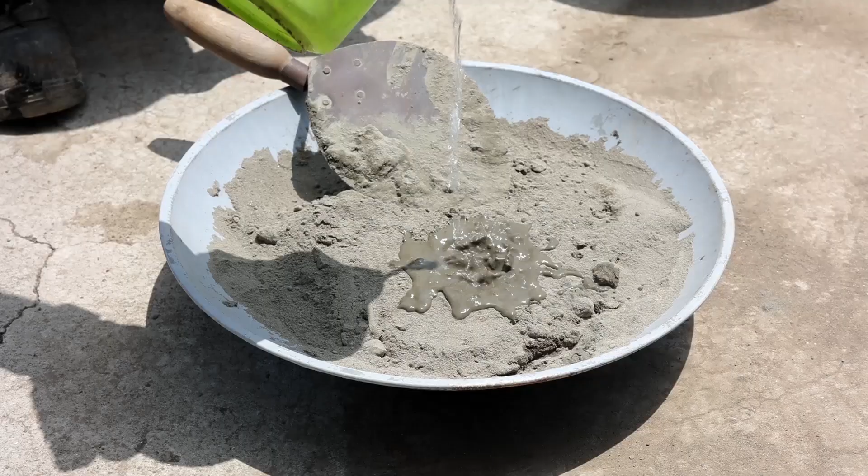You are mixing this wrongly. If you mix it with a trowel, it will not mix properly and will not be usable. Now we have got a new mixer machine for mixing mortar.

You leave it, let me tell you how to use that machine. Come with me.

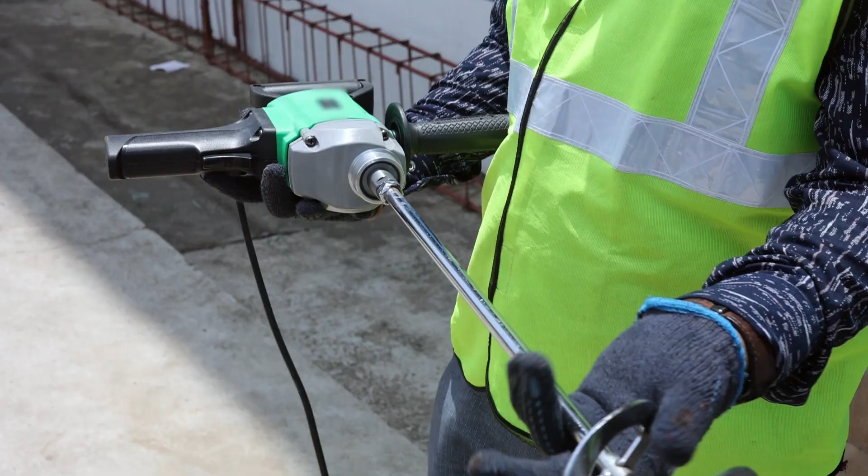This is the mortar mixing machine. These are the mixing paddles. It has two handles and this is its switch.

Whenever you have to work with this machine, hold the handle from both sides and rotate it around while pressing the start button. This will mix your mortar properly.

Let me show you how to use it once. Press while holding the handle like this.

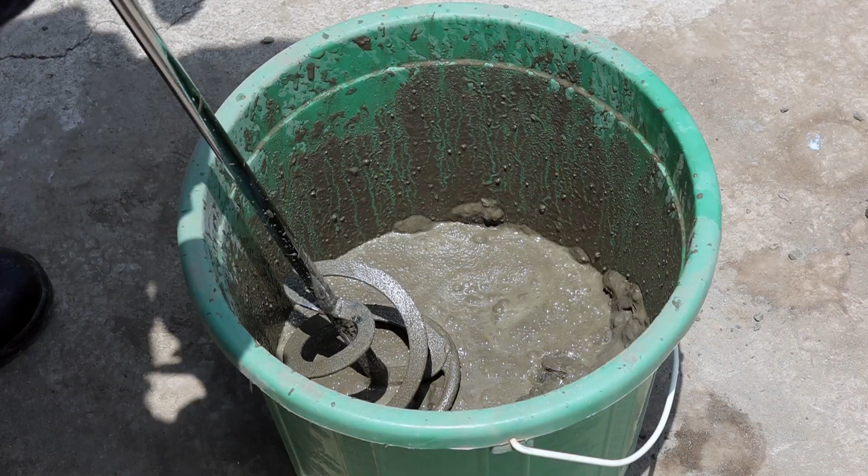After using it, you have to clean its paddle properly like this. This will clean its blade.

Just like I have mixed the mortar, you also have to mix it and show it. Grab it, press the button, then spin it around.

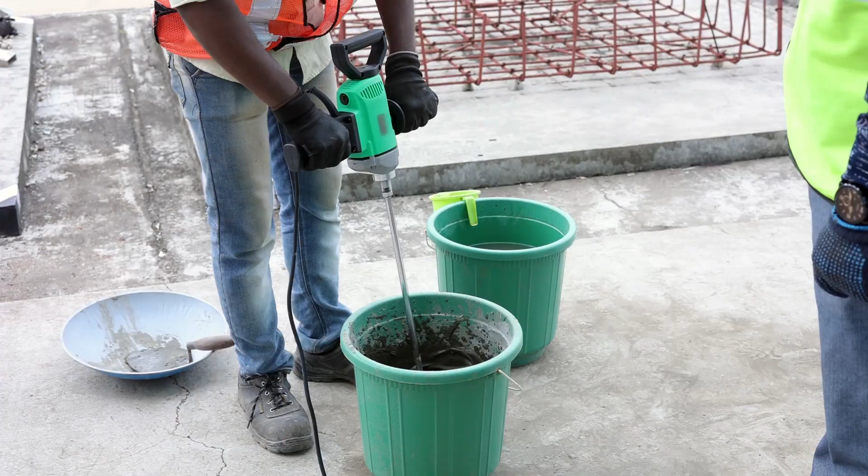Then to clean it, it has to be swirled in clean water.

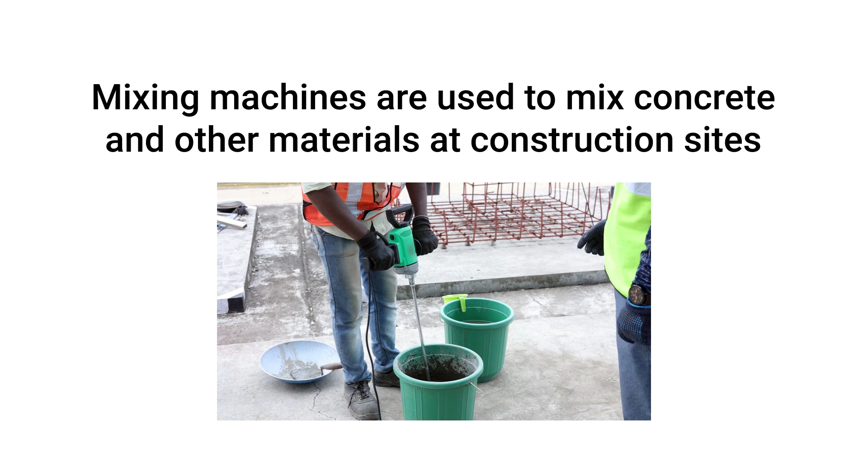Mixing machines are used to mix concrete and other materials at construction sites. It is used to prepare a strong and uniform mixture.

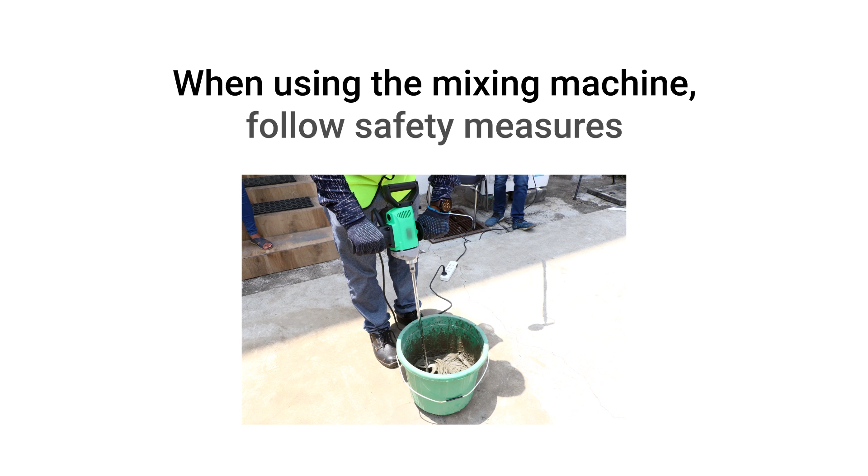When using the mixing machine, follow safety measures. You can also wear a dust mask and noise-reducing ear muffs.

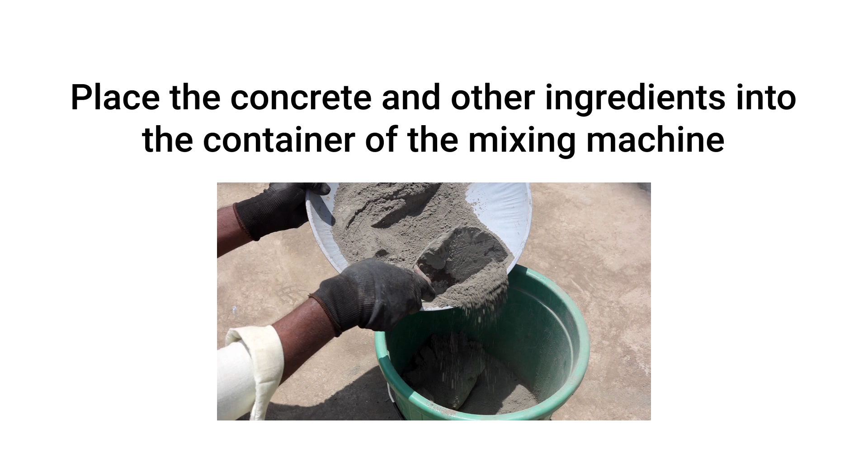Place the concrete and other ingredients into the container of the mixing machine. See carefully that the ingredients are added in equal quantity.

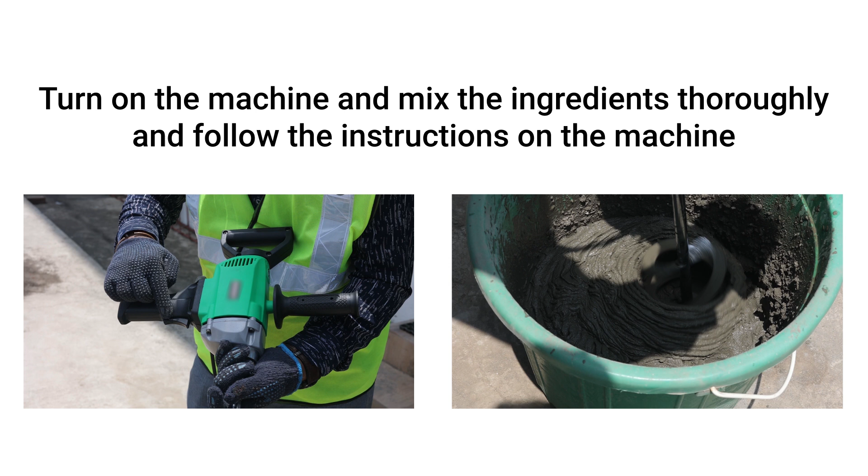Turn on the machine and mix the ingredients thoroughly, following the instructions on the machine. After finishing the work, shut off the machine in time and keep it in a safe place.

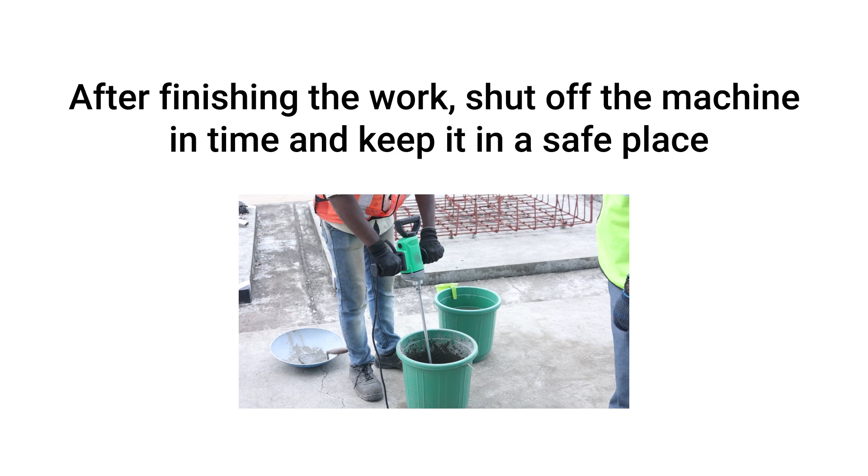Now let us understand the correct way to use our mixing machine. Follow safety measures. Put cement and other materials into the mixing machine.

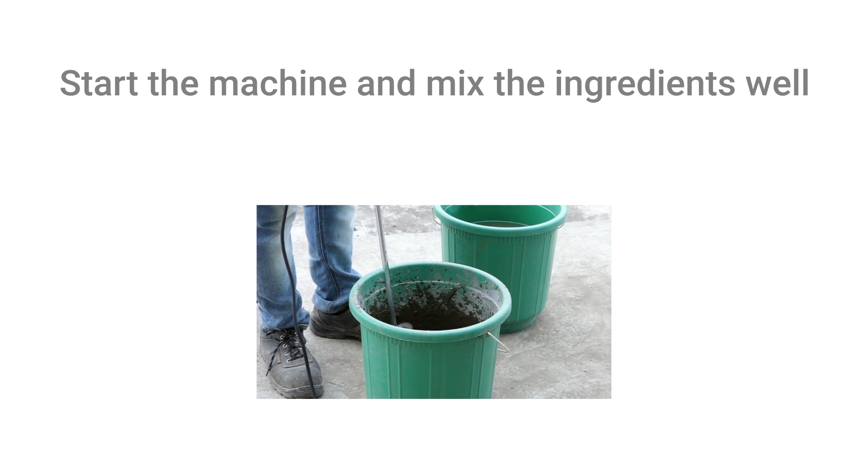Start the machine and mix the ingredients well. Keep the machine in a safe place after the work is finished.

Use of notched trowel. Let us know how to use notched trowel properly.

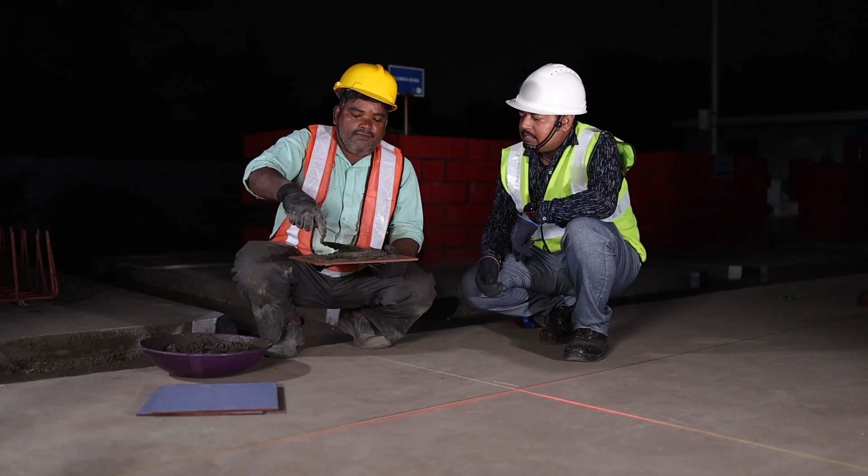To lay tiles, do you apply mortar with a trowel? Yes, sir. Due to this, the layer of mortar will be more or less - sometimes less, sometimes more, it will not be equal.

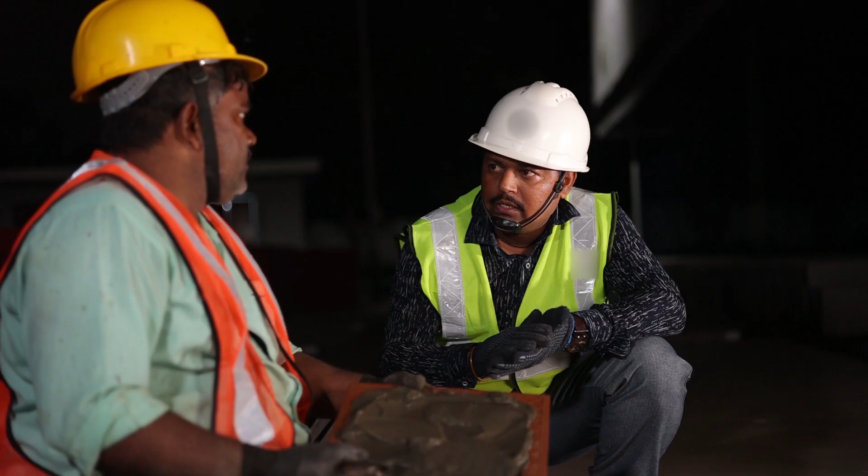Yes, sir. For this you should use a notched trowel. These are its notches. If you apply mortar on the tile with this, then its surface will be uniform. Yes, sir. Let me tell you how to use it.

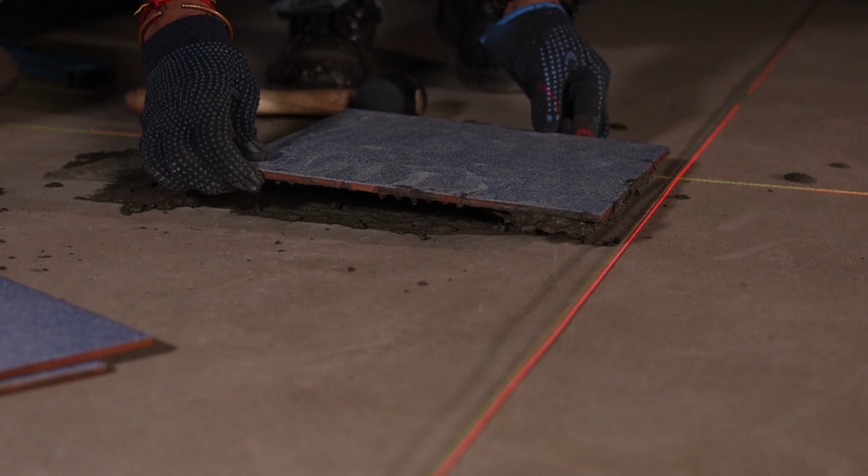Applying a uniform mortar will ensure that your tile is set properly and will never break when you fix it with a rubber hammer.

Then check it once with a leveler. If it is in the center, then it is fine. If not, then correct it with a rubber hammer and then check with a leveler.

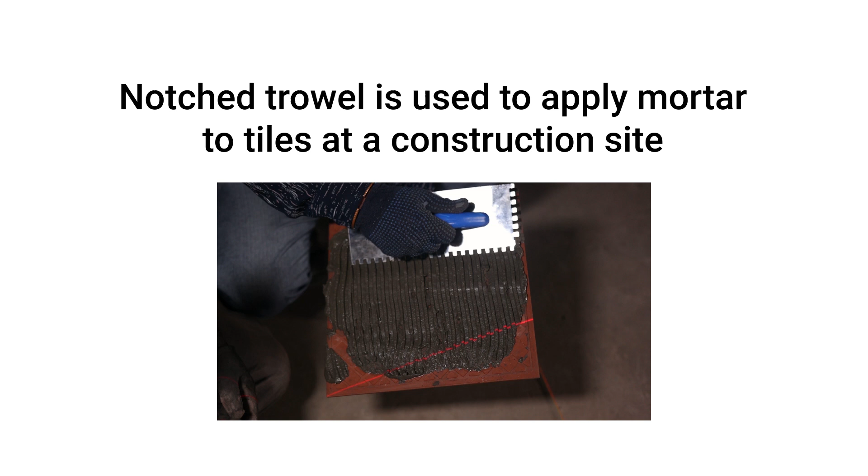Notched trowel is used to apply mortar to tiles at a construction site. It has a zigzag-shaped blade which helps in applying the mortar to the tiles.

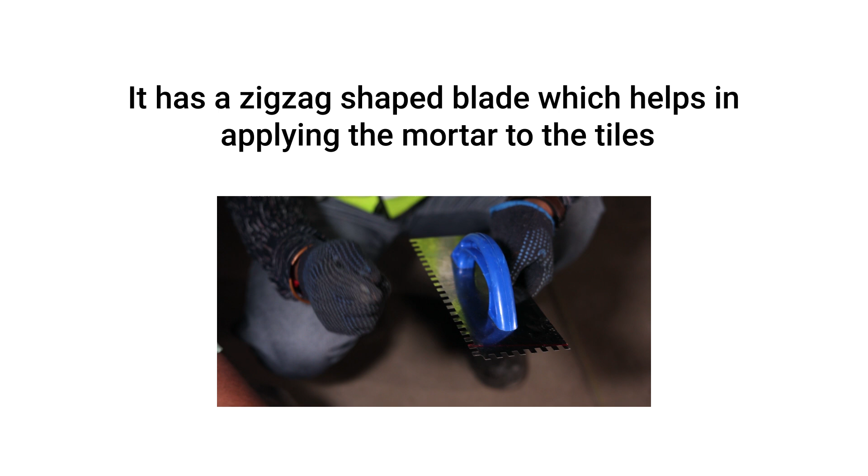When using a notched trowel, follow safety precautions. Use safety glasses, helmet, and gloves. Also use a dust mask to avoid dust and adhesives.

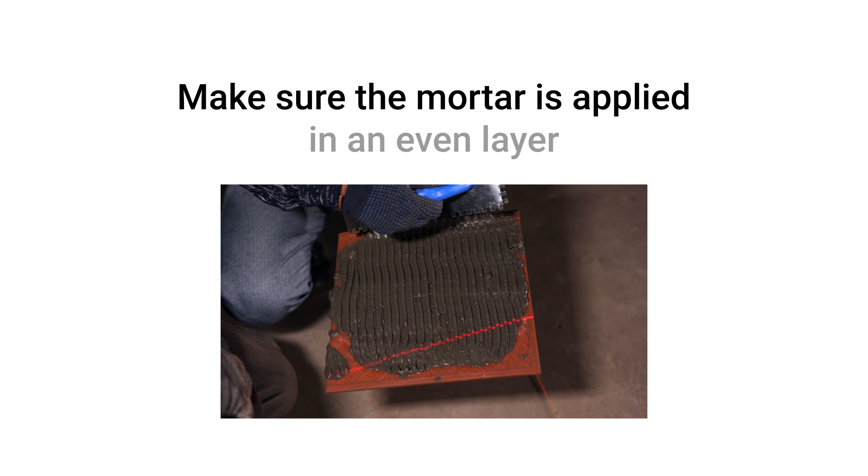Use a notched trowel to apply the mortar to the tiles. Make sure the mortar is applied in an even layer.

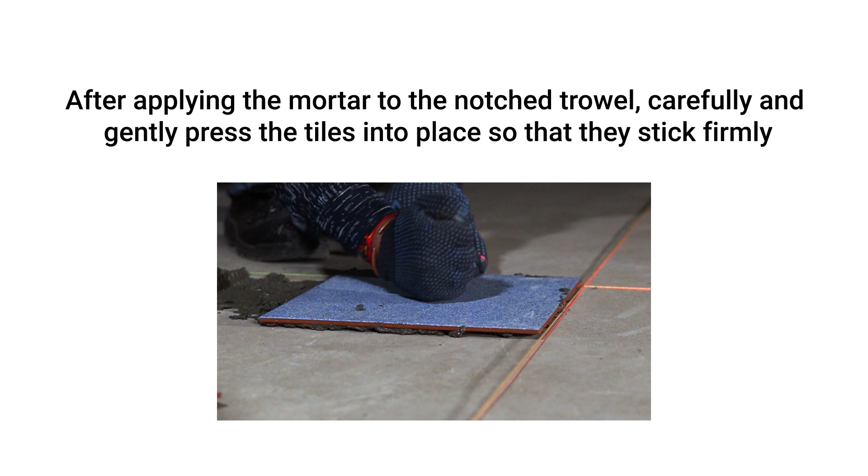After applying the mortar to the notched trowel, carefully and gently press the tiles into place so that they stick firmly. Clean the notched trowel after the job is finished.

Now let us understand the correct way to use a notched trowel. Follow safety measures. Place the mortar on the notched trowel.

Carefully and gently press the tiles into place so they stick firmly. Clean the notched trowel after you are finished.

Use of mortar mixing tray. Let us know how to use the mortar mixing tray correctly.

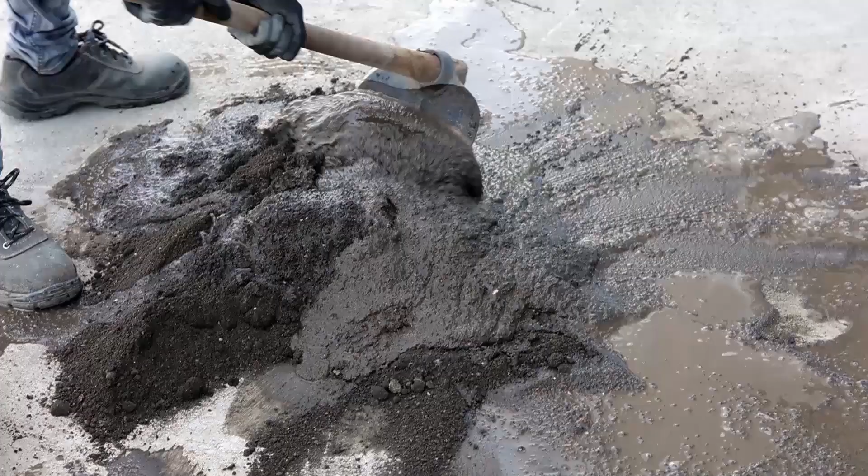Wait, this isn't how mortar is prepared on the ground. Too much water has been added and cement is also flowing.

We have a mixing tray for this, we will use that. This will make the mortar well and there will be no loss of material. This is a mixing tray, prepare the mortar in it.

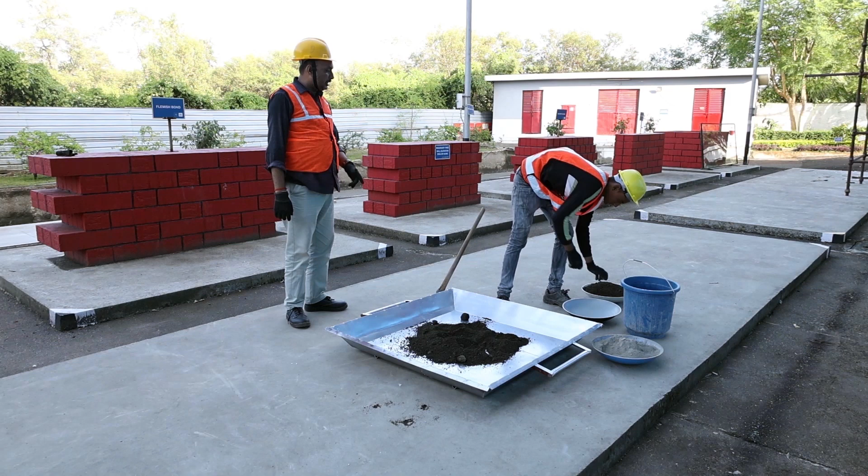Pour as much cement as you need. Very good.

You can see that the mortar is being prepared very well. It is mixed properly. Now add water to it.

You understood how to prepare mortar in a mixing tray. Due to this, neither the ground got dirty, nor the water and cement got spoiled. The mortar was also prepared properly.

The strength of the mortar prepared in this way is more than that made on the ground. That is why mortar should always be prepared in a mixing tray.

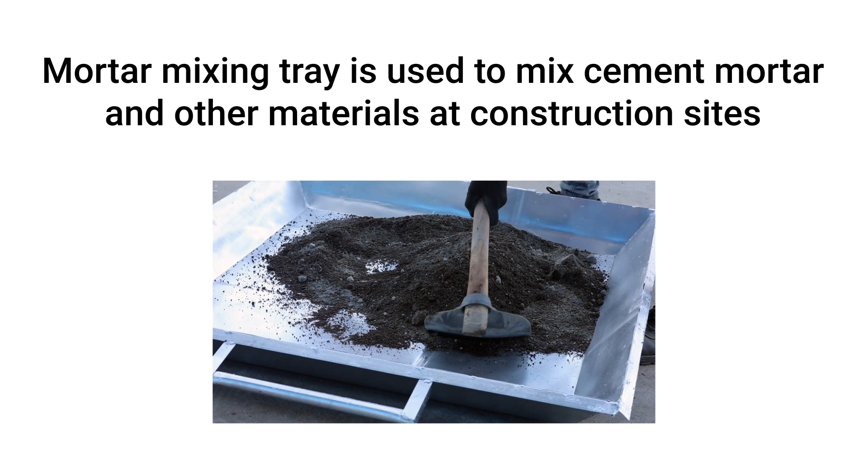Mortar mixing tray is used to mix cement mortar and other materials at construction sites. It is used to prepare a strong and uniform mortar mix.

When using mortar mixing trays, follow safety precautions. Use safety glasses, helmet and gloves. Those dealing with noise can also wear dust masks and earmuffs.

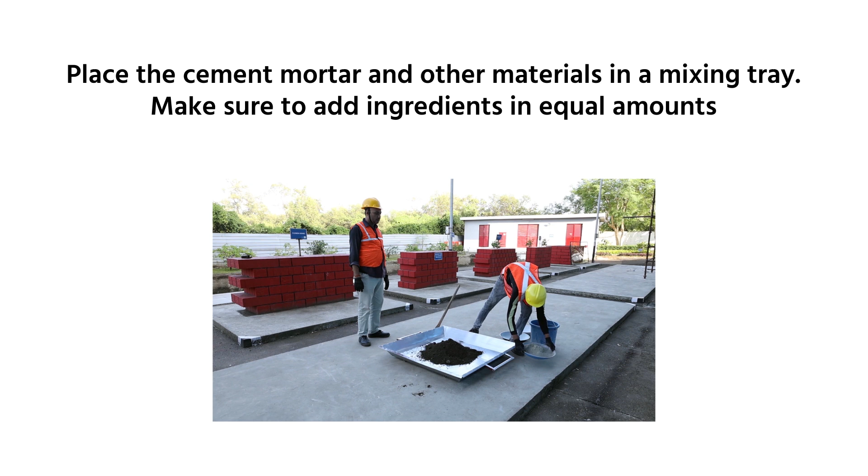Place the cement mortar and other materials in a mixing tray. Make sure to add ingredients in equal amounts.

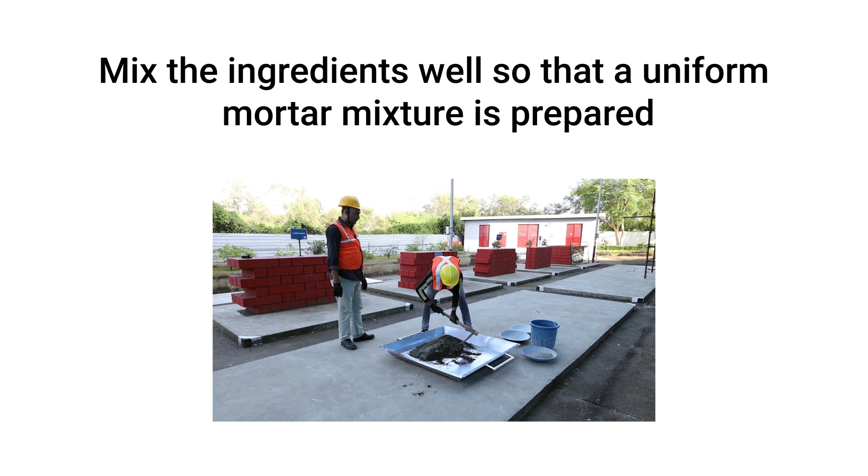Mix the ingredients well so that a uniform mortar mixture is prepared. Work slowly and carefully when using the mixing tray. Clean the mixing tray after you are finished.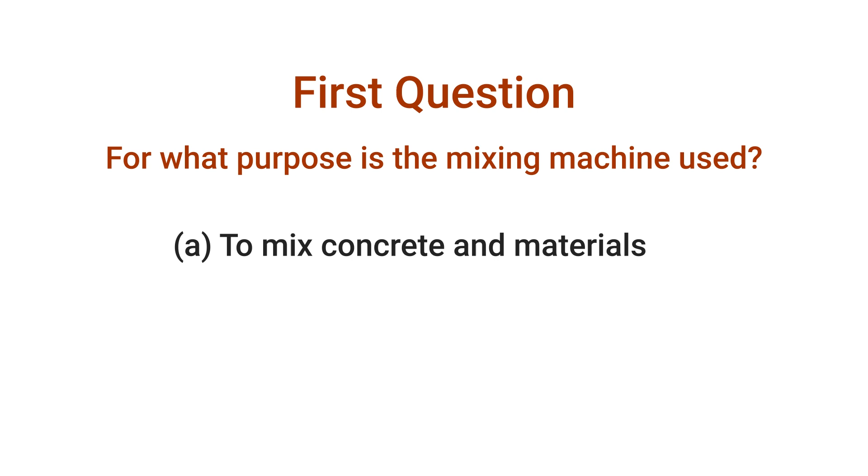For what purpose is the mixing machine used? A. To mix concrete and materials. B. To cook. C. To paint.

What should be done with the mixing machine after the work is finished? A. Keep the machine running. B. Stop on time and park in a safe place. C. Leave the machine as it is.

For what purpose is notched trowel used? A. To apply mortar to tiles. B. To drain the water. C. For security measures.

Should safety measures be followed while using mortar mixing tray? A. Yes. B. No.